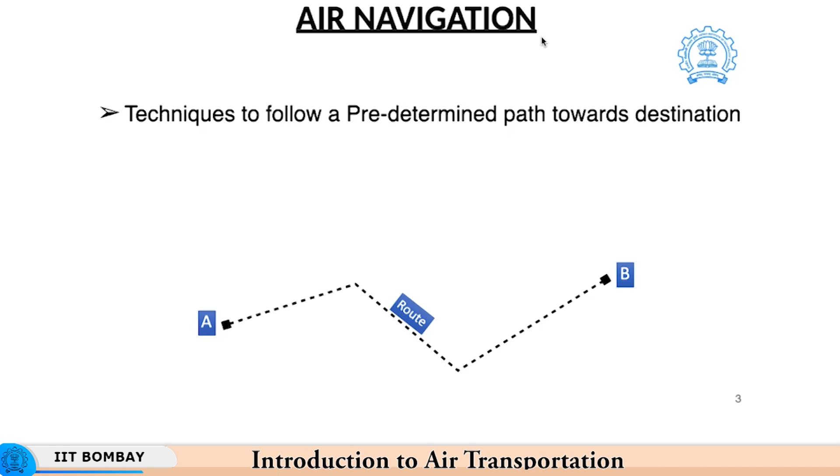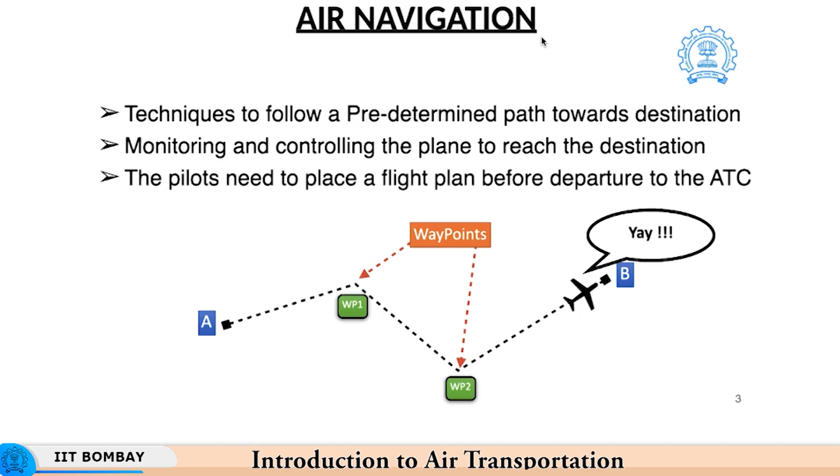Air navigation basically entails the different techniques that are required to be followed during the flight so that we can reach our destination via the predetermined flight path. This process also involves regular monitoring as well as controlling the plane so that the destination can be reached with the minimum amount of time and fuel consumption while covering the predetermined waypoints. The pilots, whether flying through visual navigation or via instrument navigation, need to file a flight plan to the nearest ATC before departure.

So, in order to understand any topic, we need to understand the historical evolution of that topic. This slide will cover different aspects related to the development of air navigation throughout history. The history of this evolution can be divided into the following subcategories. During the advent phase, that is the 1900s to the 1910s, most of the air navigation was carried out through visual markers, visual meaning through reference to the horizon. The pilots would basically make use of the visual aids available at their disposal to carry out the navigation.

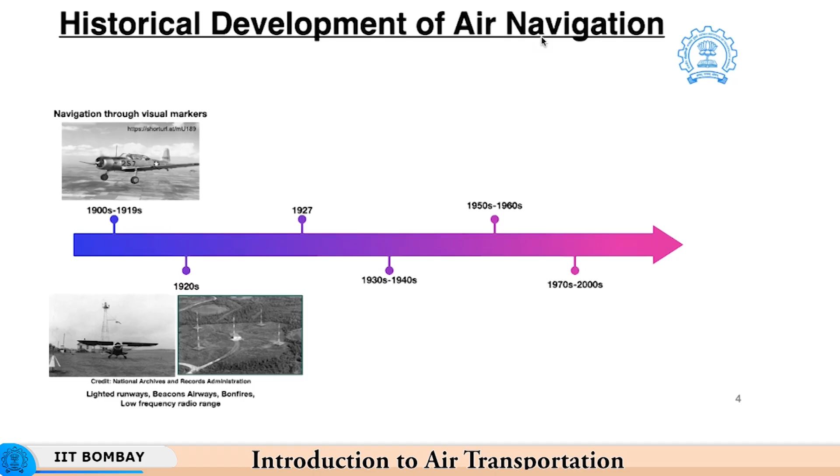Subsequently, as the need arose to carry out air mailing, which required flights to be operated in night conditions, a number of additional techniques were integrated across different airports. For instance, many airports made use of lighted runways, beacon airways, bonfires, as well as low frequency radio range communications. Subsequently, the most famous flight by Charles Lindbergh in May 1927 was one of the cornerstones of air navigation development. In fact, this 33-hour flight from New York to Paris was the turning point in aviation.

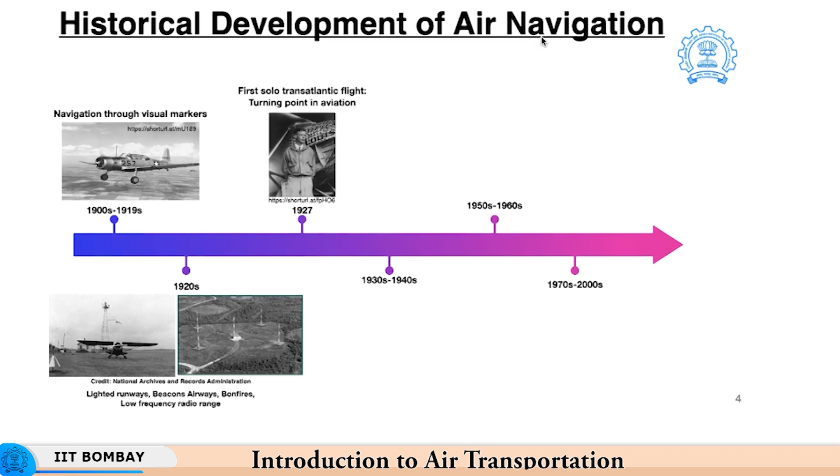The difficulties faced by Charles Lindbergh during his transatlantic flight were pivotal in determining the overall development of air navigation. In fact, this flight proved so crucial that this time is termed the Lindbergh boom, which resulted in a significant increase in interest towards aviation as well as development of various air navigation technologies. Based on the requirements to increase communication and improve air radio navigation technologies, techniques like non-directional beacons and ADF, that is automatic direction finders, were integrated on various aircraft to carry out navigation.

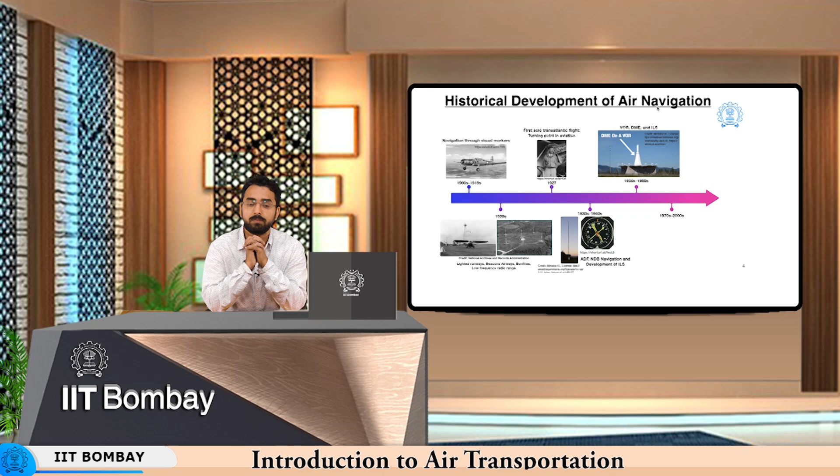Subsequently, the 1950s to 1960s era belonged to the evolution of VOR and DME as well as ILS technology, which were more advanced air navigation techniques to carry out more precise navigation. Between the 1970s and 2000, the aircraft industry ventured onto new techniques of air navigation, that is INS and GPS. Through the integration of these sophisticated technologies, navigation was not just limited to the line of sight range. In fact, navigation could be carried out over transatlantic regions also because of these technologies.

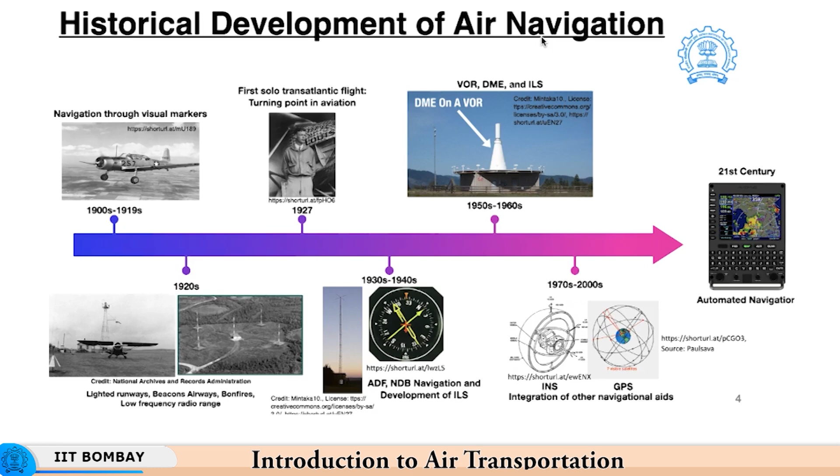As the technology further evolves, the 21st century is poised to implement more automated ways of carrying out air navigation. Most of the operations associated with navigation, like communicating with the ATC or vice versa, checking the waypoints, checking the overall route and the trueness of the route being followed by the flight, will automatically be carried out by the onboard computers. After understanding the historical evolution of air navigation, we need to understand the various factors that determine air navigation planning.

So air navigation, which entails the process of reaching from point A to B, is a process that needs to determine the most optimum route between A and B, so that minimum amount of fuel and time is consumed during the flight. This particular planning or route decided by the pilot is dependent on a number of external factors.

Some of these include that the planned route should conform with the laid down ICAO standards, ICAO rules, as well as compliance with the latest ATC instructions related to that route.

The route should be planned in such a way that fuel consumption as well as time is mitigated as much as possible. The route should also be planned so that a minimum safe distance is obtained with respect to neighboring flights as well as underlying airspace considerations, which we will discuss in a later slide.

So one of the most important parameters related to air navigation planning is what facilities and airways are available to the pilot, so that flight planning is carried out in a more efficient manner.

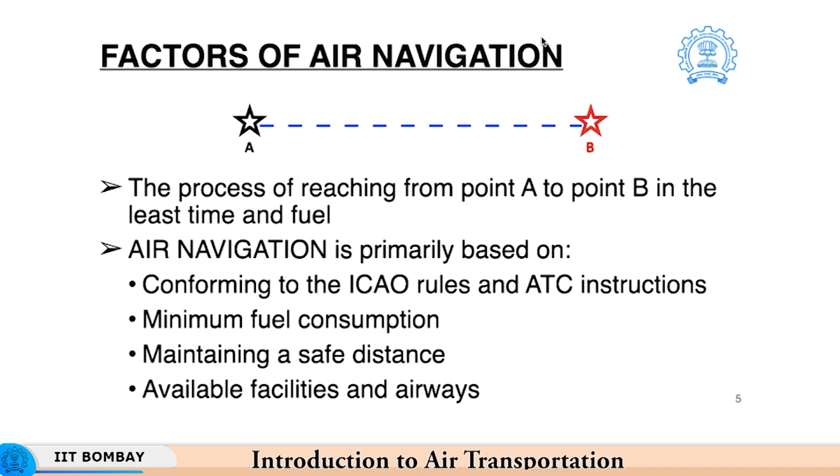So after going through the factors that affect the overall air navigation planning, we need to understand the objectives of any air navigation process. First and foremost, the objective related to air navigation is determining our current location.

Based on determination of the current location, we need to understand the nearest waypoint associated with our planned route, and what is the optimum route between the two waypoints, so that minimum fuel and time is consumed during this planned route.

So in order to achieve these objectives, there are many other external considerations that the pilot needs to take into account while carrying out flight planning. Some of these external factors include the presence of weather, that is, whether the planned route has any hazardous weather associated with it. Based on presence of such hazardous weather conditions, the pilot needs to readjust their planned route.

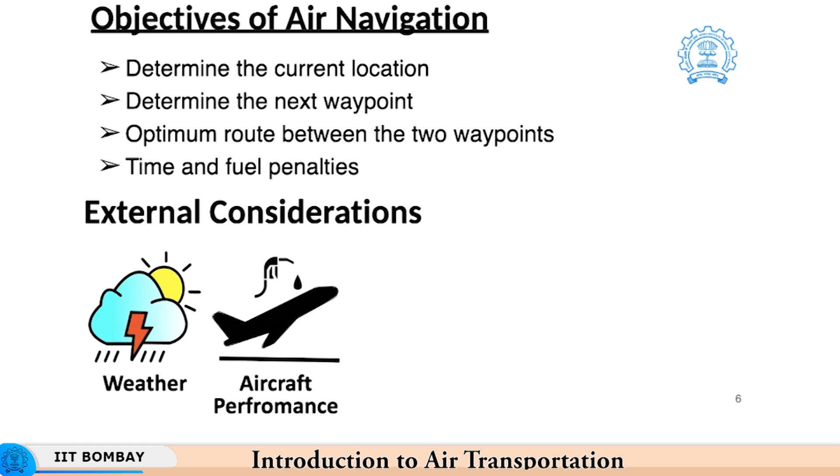Second parameter related to air navigation is the aircraft performance. As we all know, with advancement of time and increase in operational cycle of any aircraft, their performance goes on reducing. So the planning needs to consider this factor also.

The airspace requirements, as covered in the air transportation course during earlier lectures given by Professor Rajkumar Pant, there are many airspace constraints related to air traffic management service. So while carrying out air navigation planning, such considerations or constraints need to be taken into consideration.

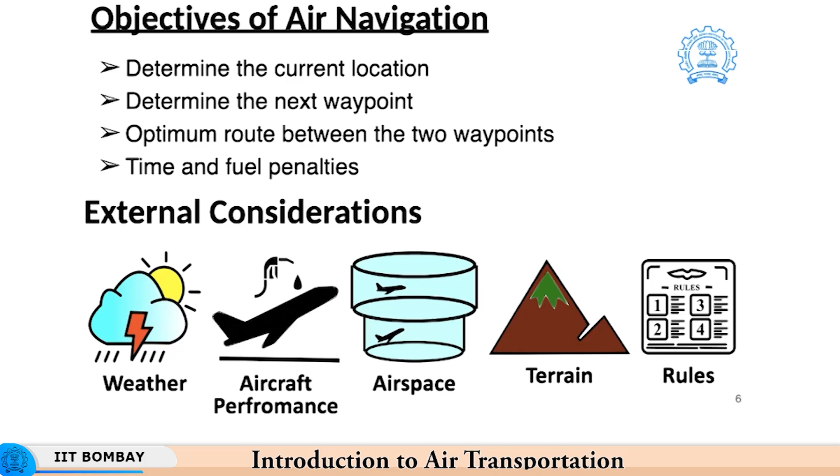The terrain underlying the planned route also plays a very critical role in carrying out the overall flight planning. Last but not least, the applicable rules associated with the planned course as well as the planned way of navigation also play a critical role in carrying out overall air navigation.

So based on all these aspects, the aircraft performance, applicable facilities, and instruments available to the pilot, there are two different types of rules by way of which pilots operate their flight: the visual flight rules and the instrument flight rules.

The visual flight rules, the most rudimentary form of air navigation, is purely based on visual flight navigation. The pilot makes use of visual references available during daylight and weather conditions, using the natural horizon and external visible outside reference to carry out the overall navigation.

This type of navigation requires a number of key components for efficient navigation. These components include the overall flight planning. As mentioned earlier, all air navigation requires filing of a particular flight plan to the nearest ATC before the commencement of the flight.

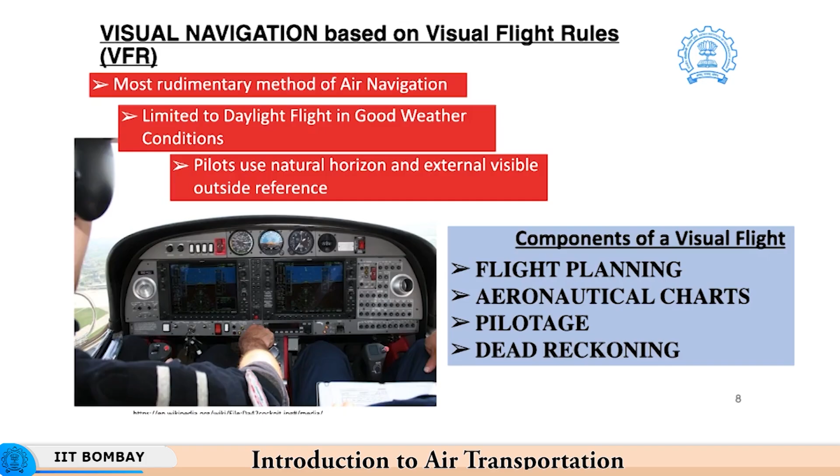Then the visual flight rule navigation makes use of aeronautical charts during the pre-flight as well as in-flight scenarios to carry out the planning. The two methods used to carry out this navigation are called pilotage and dead reckoning. Details related to these two methods will be covered in later slides.

So based on this, we can determine the different prerequisites of any VFR flight. If you are planning to carry out any VFR flight, you need to have three components with you always. First and foremost, the flight plan, which is designed by the pilot before the flight.

The planning is overall dependent on the fuel consumption requirement and the waypoints that the pilot will intersect during his flight.

The second component of the VFR flight is the aeronautical charts, and the third and one of the most important prerequisites is the weather forecast.

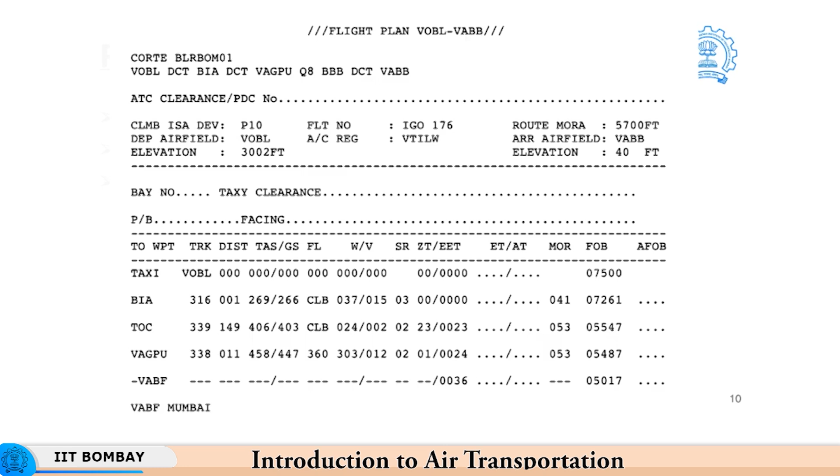As far as the flight plan is concerned, I will put forth a particular example. In this flight plan, the flight is planned between Bangalore and Mumbai, and the overall flight plan includes details related to the waypoints the flight will intersect during the flight, and minute details related to the aircraft, what would be the true airspeed and ground speed, what are the flight levels the plane will follow during the course, and what are the external wind conditions associated with the planned flight.

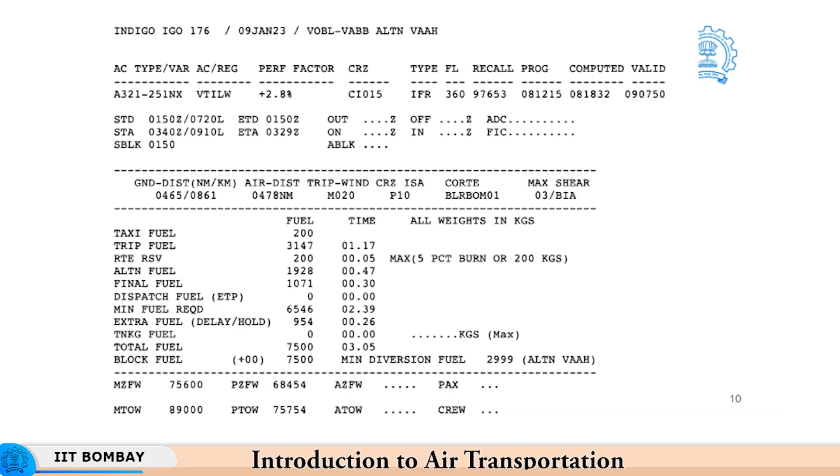Subsequent to this, the flight plan further includes details related to fuel consumption that the plane would incur during the different courses of flight. So the flight plan overall plays a very critical role in carrying out any visual flight rules navigation.

After carrying out and filing the flight plan, pilots need to use aeronautical charts to carry out navigation. These are specialized maps used by pilots that include different terrain features associated with the area being flown, applicable hazards and obstructions associated with the route, navigation routes and aids available at the pilot's disposal, applicable airspace rules, and the airports available for the pilot to land upon or use facilities from.

These aeronautical charts are of different categories. Most visual flight rule navigation makes use of a particular category called sectional charts. These 1:500,000 aeronautical charts, or sectional charts, are used comprehensively by pilots to carry out visual flight navigation.

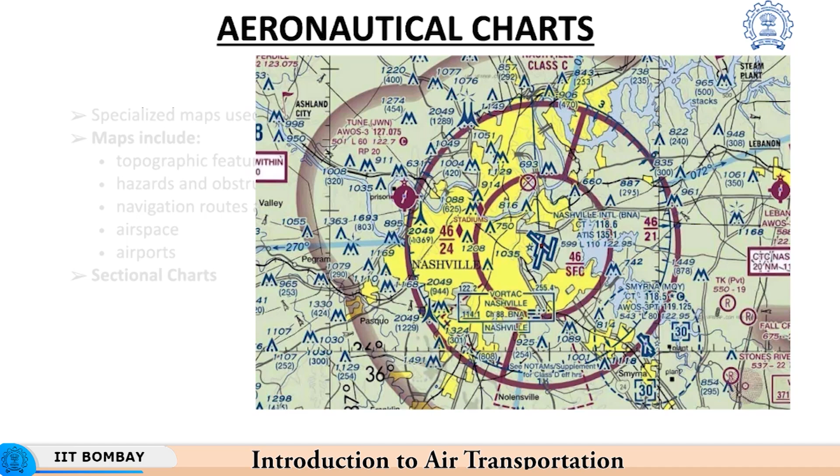There are also details related to obstructions associated with this sectional chart, and circles describing the airspace. For instance, the solid magenta line corresponds to class C airspace, and the dotted circles are class D airspace. So these sectional or aeronautical charts play a critical role in the overall air navigation process. To assist in flight planning, all these aeronautical charts are accompanied by an appropriate legend, so that flight planning can be carried out based on referring to these legends.

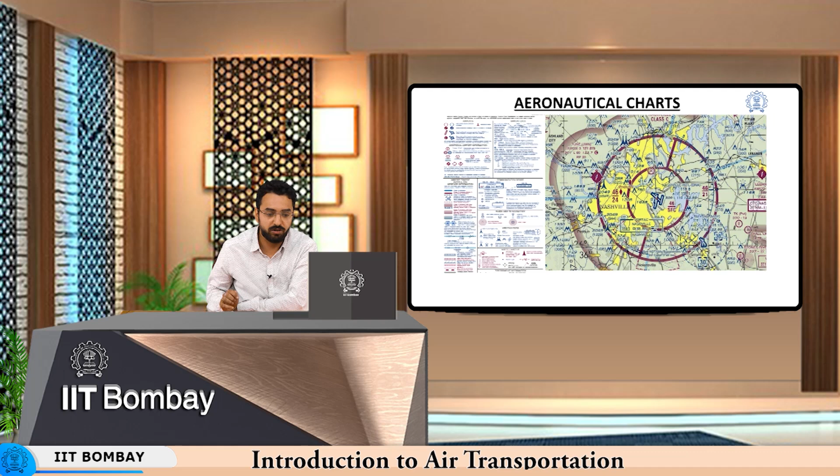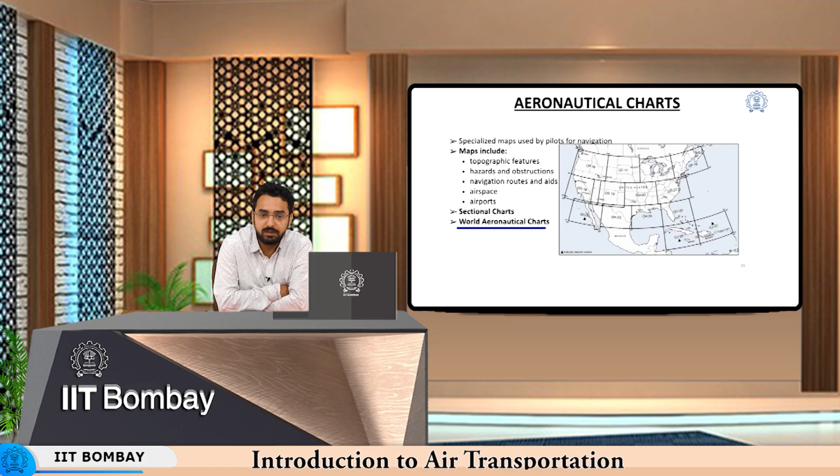World aeronautical charts are a subcategory of aeronautical charts, scaled at 1:1 million. Because of the increased scaling, most features related to control towers and minute obstructions are hidden. However, these charts have been used previously for long distance flights by different flight applications.

The third important prerequisite of any VFR flight is the weather forecast. Before commencement of any flight, pilots need to carry out a thorough evaluation of the weather forecast associated with the airport of departure as well as the airport of destination, also understanding the weather forecast associated with the planned routes so that on-course planning can be carried out.

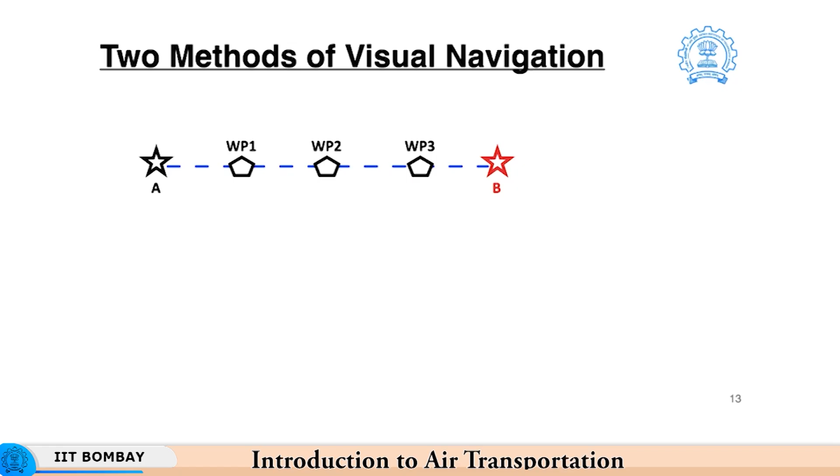So what are the two methods of visual navigation? If we want to reach from point A to point B, we can carry out visual navigation through the usage of two methods while covering the different waypoints. These two methods are called pilotage, and the second method is called the dead reckoning method.

What is pilotage? Pilotage is basically the most basic form of visual navigation, which makes use of visual aids and markers along with the aeronautical chart to carry out navigation. How does this work? Let's understand this with an example.

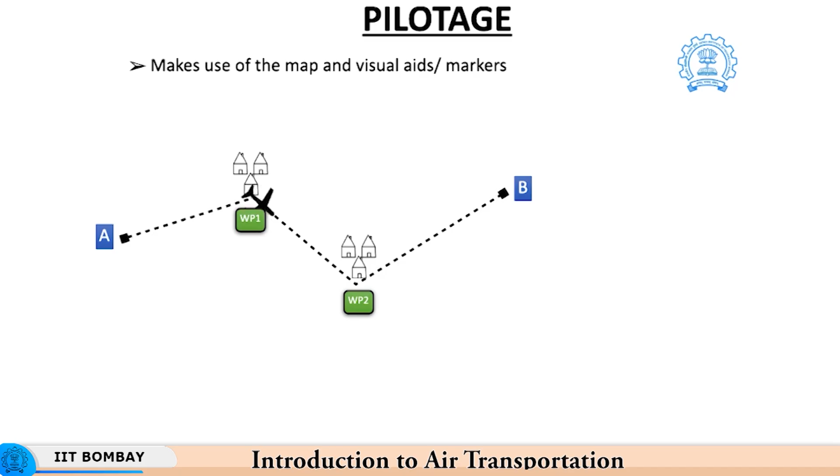Suppose a pilot wants to reach from point A to point B. He will select two different towns annotated as waypoint 1 and waypoint 2. When he selects these waypoints, he wants to have a particular obvious visual reference which the pilot can follow during his flight, and he can ultimately reach his destination. Based on these waypoints, he will plan his route and also follow them to carry out this navigation.

Despite carrying out the planning, regular adjustments are required to be carried out during the flight, so as to mitigate the deviations that arise because of external environmental conditions. These external conditions are basically related to deviations that arise due to the presence of crosswind conditions. So the inclusion of crosswind condition and the applicable corrections required to carry out air navigation plays a very critical part of the overall pilotage process.

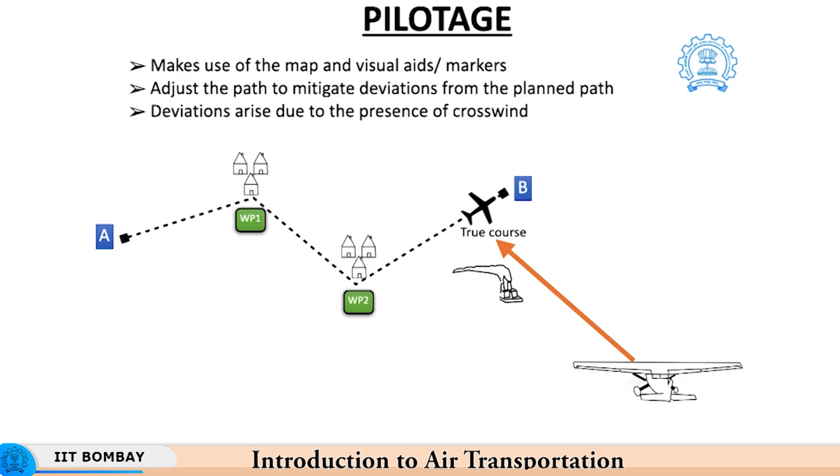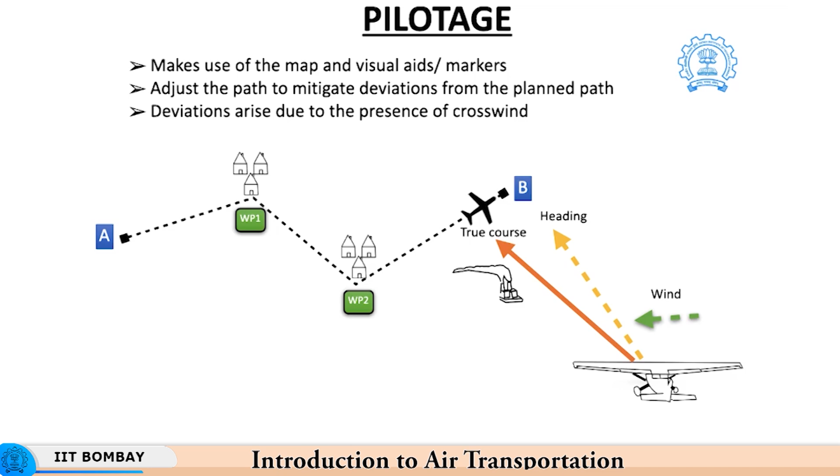In case of the presence of any wind conditions, the pilot needs to adjust his heading according to the external wind condition so that the true course can be efficiently followed. For example, in this case, the wind is coming from the right, so the pilot needs to adjust his heading towards the right so that the overall deviation towards the left can be mitigated and the true course can be followed by the plane.

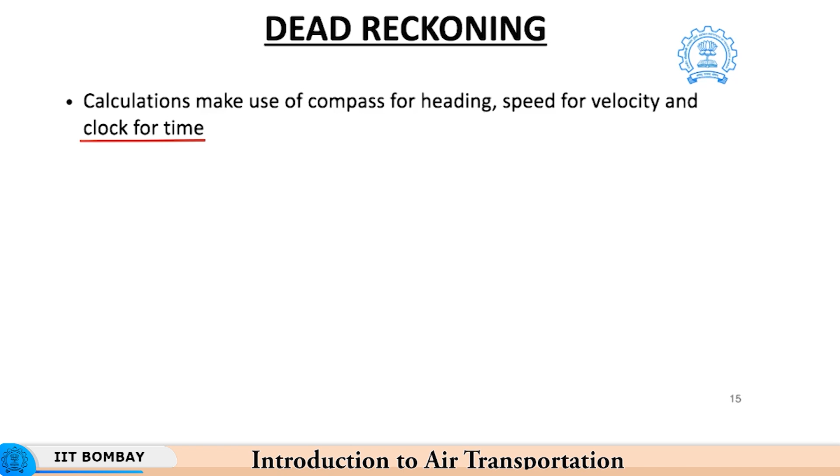The second method of visual navigation is called the dead reckoning method. How does this differ from pilotage? It differs in the sense that along with heading calculated by compass and speed determined by the airspeed indicator, this process brings into picture the time aspect also. So pilots majorly make use of a combination of pilotage as well as dead reckoning to carry out their navigation.

This method is subsequently carried out to calculate the overall deviation that the flight has incurred during the flight. How is this done? For example, if the pilot has planned to follow a particular course from point A to point B, he determined his location at a point at 1000 hours. After 10 minutes, he determines that the position has changed to a particular reference point which he has logged. After another 10 minutes, he will again determine what is his current location.

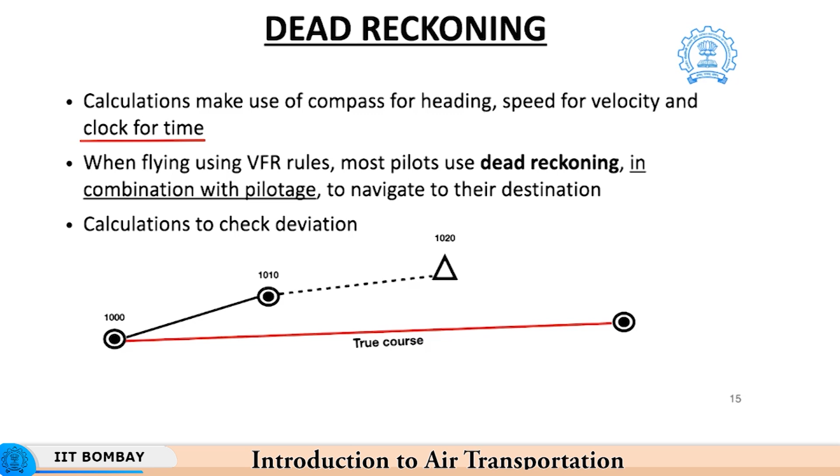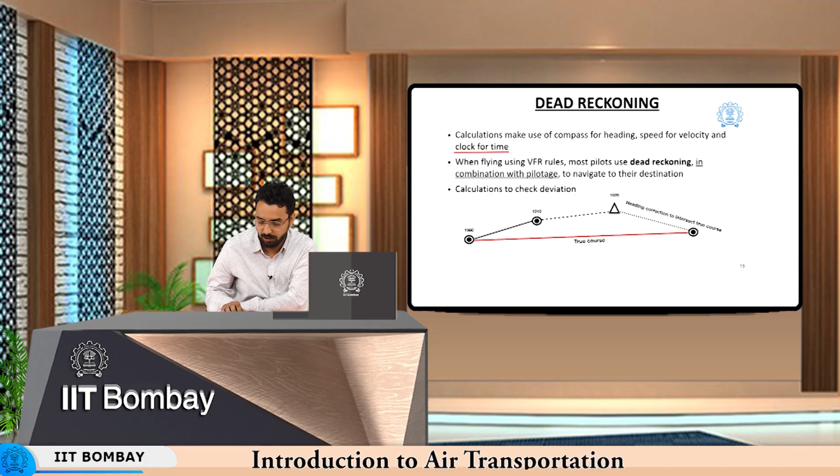So based on time, speed and heading, and the usage of proper trigonometry, he can calculate the applicable heading that the pilot needs to adjust his plane to, so that the true course can be intersected. So this is the overall process of dead reckoning, wherein time also comes into picture.

One of the most important aspects related to dead reckoning is the wind triangle. What is this wind triangle? It is a mathematical tool that is used comprehensively by pilots to carry out different aspects related to a flight. For instance, through the usage of wind triangle, wind correction angle can be determined, so that the overall heading that the pilot needs to follow can be determined.

The wind triangle can also be used to calculate the drift. For example, during a flight, the pilot determines that the plane has drifted away from its planned course. Through the usage of this wind triangle, the overall drift of the particular plane can be determined. Based on this wind triangle, the overall ground speed as well as the heading to maintain the true course can be obtained, and based on these calculations, the overall time that the pilot would incur to reach the destination can also be obtained.

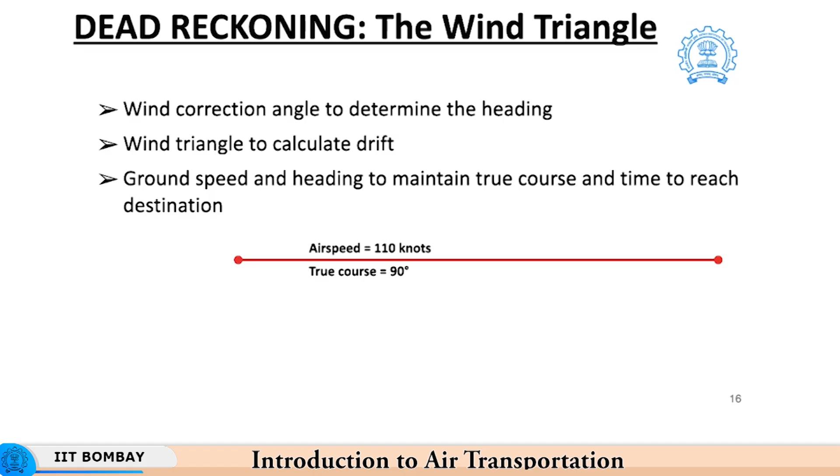So in order to understand this wind triangle, there are two different methods that I have presented in this presentation. Method A: in method A, for example, we know the airspeed that the flight will follow, and what is the true course that the plane needs to follow to reach its next waypoint. In this case, the length of this line is not yet determined.

So from the head of this wind direction, a line will be drawn intersecting the true course line in such a way that the length of the red line would correspond to an airspeed of 110 knots. So based on this calculation, we can determine what is the wind correction angle that will be required to follow the particular true course. So then the other method, that is method B.

In this method, we firstly draw a line corresponding to 110 knots related to a true course of 90 degrees. Suppose we know a wind speed of 20 knots coming from port, from a direction of 30 degrees. The line that joins the head of the true course line to the wind direction will be ultimately useful to carry out the overall drift.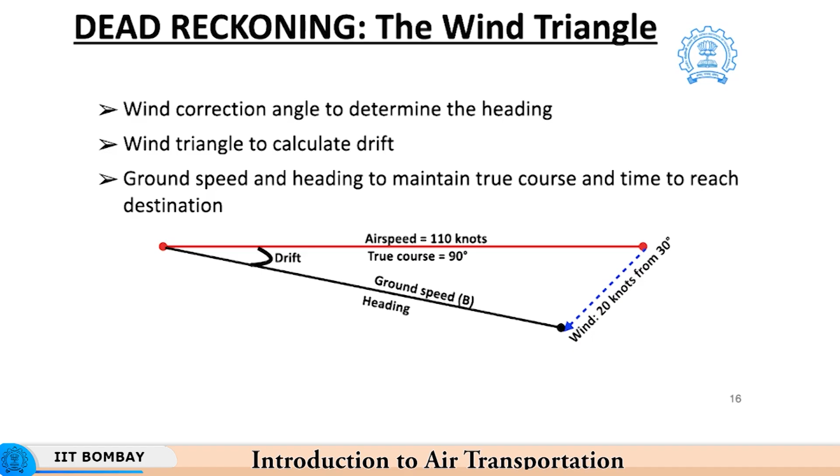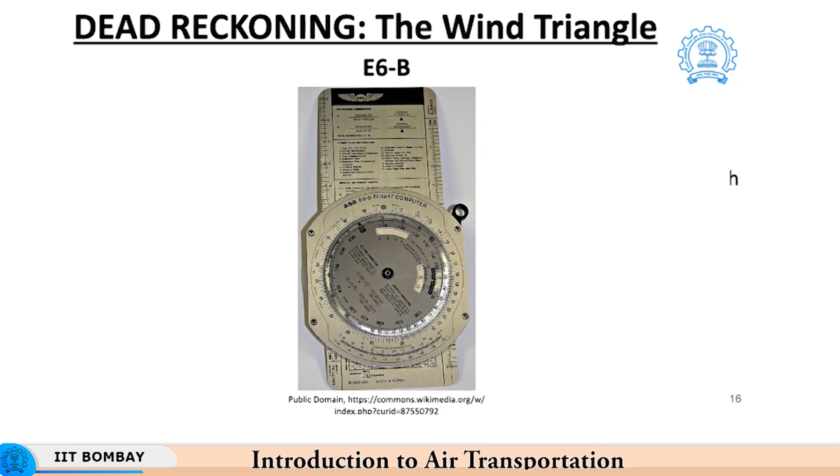As you noted till now, this is a tad difficult during the overall flight operation. In order to circumvent this problem, pilots during their visual flight make use of a particular computer called the E6B computer. So all these calculations that were shown to you previously have been integrated in this particular E6B computer itself.

So as far as the instruments related to visual navigation are concerned, there are two important instruments that are used to carry out such navigation. These two instruments are called the magnetic compass and the heading indicator. What is a magnetic compass? A magnetic compass is based on a simple principle of magnetism. As many of the viewers might know, a magnetic compass basically works on the fact that whenever you place a magnet, it always aligns with the north-south direction. Based on this principle itself, the magnetic compass operates.

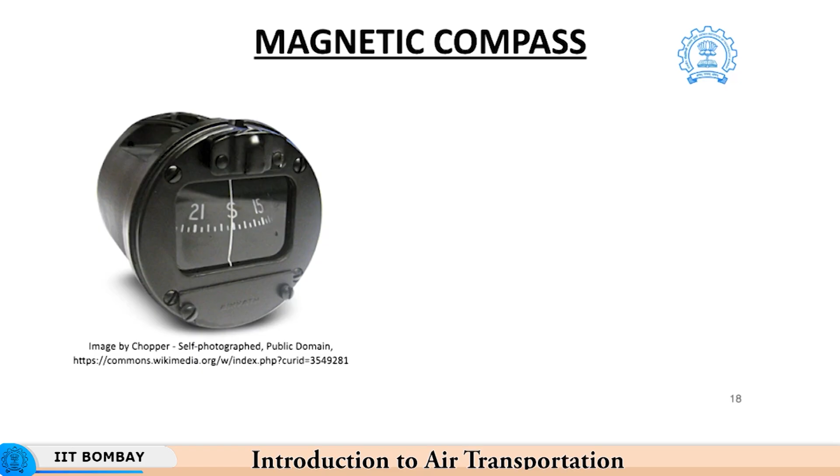So in this particular figure that you see, this is a magnetic compass which is embedded inside a liquid, and based on the magnetic orientation, the overall magnetic heading of the aircraft can be determined. A point to be noted here is that these instruments always point towards the magnetic north pole, and so the heading shown by the instrument is a magnetic heading reading, whereas the aeronautical charts used to carry out flight planning are based on true north.

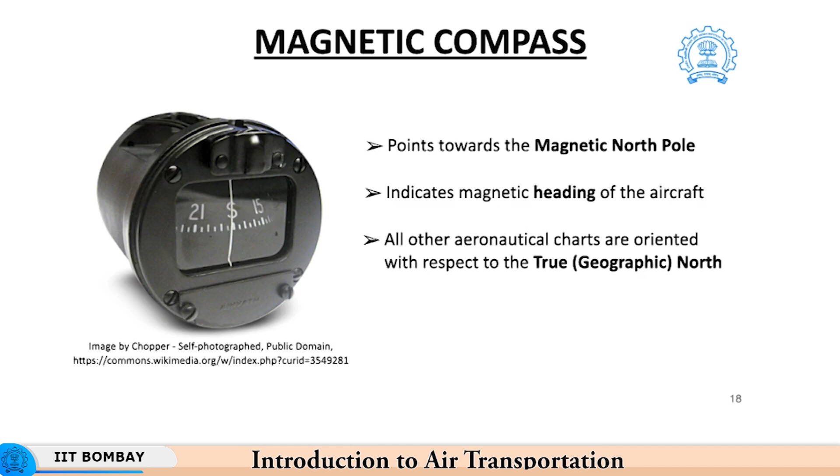So here lies the ambiguity. There is a difference between magnetic north and true north. This difference leads to a new term that is called the variation. This difference between true north and magnetic north is a very important aspect of carrying out navigation using the magnetic compass. Why does this variation arise? For instance, suppose there is a line joining true north and true south.

Ideally, if magnetic north and south were aligned with true north and south, this type of variation would not arise. But the magnetic meridian, the great circle that passes through the magnetic north and the magnetic south, is not aligned with the true meridian. For instance, the magnetic north is located somewhere in the northern Canadian region, and so the difference between the true north-south line and the magnetic north-south line is called the variation angle. Now this variation angle depends on the aircraft's current location and time.

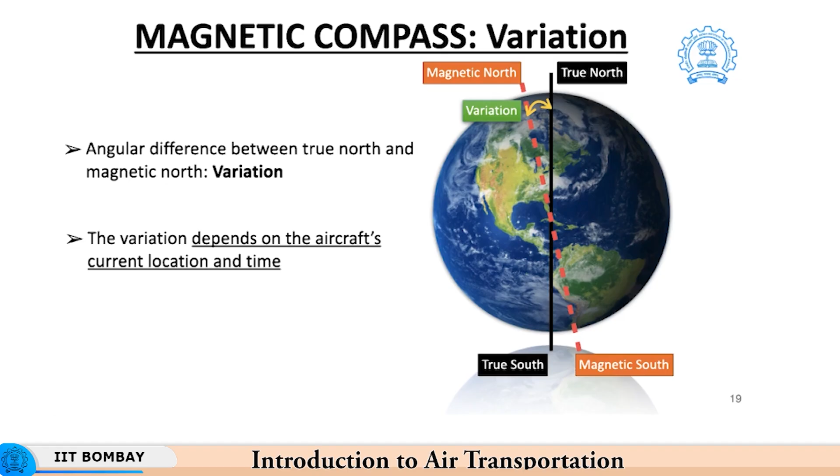So if you're thinking that magnetic variation would be the same at all locations, it is not the case. It varies from location to location as well as from time to time. In order to determine this, pilots make use of isogonic line charts. As you can see in this figure, this is a representation of the variation at different locations on our Earth, and the lines joining similar variation are called isogonic lines. The lines which join variation corresponding to 0 are called agonic lines. These charts are used by pilots to determine the variation angle.

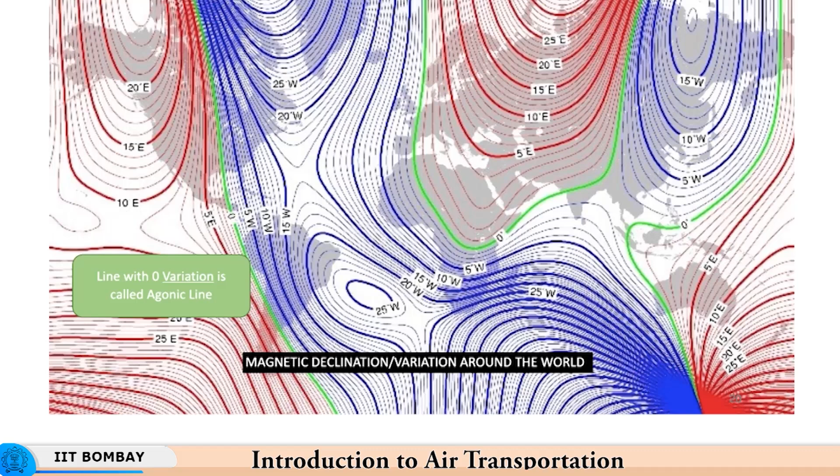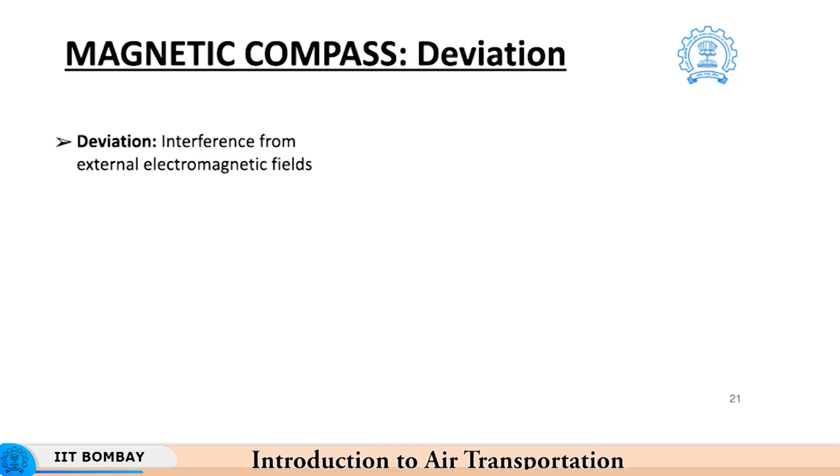The other disparity related to magnetic compass readings is called the deviation. So why do these deviations arise? These deviations arise because of the interference of external electromagnetic fields with the compass operation. In order to determine this value during cockpit design itself, the engineers determine the applicable deviations that arise because of these electromagnetic fields, and these are presented to the pilots in the form of a magnetic deviation card.

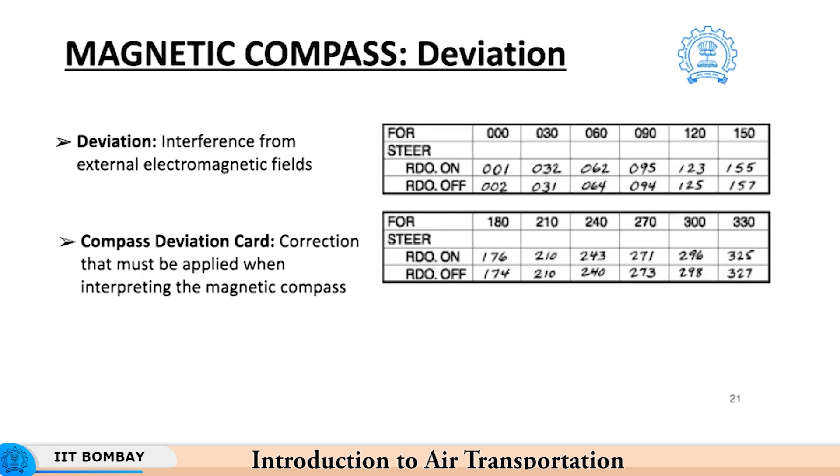During the calculation process, the pilots refer to these deviation cards to carry out the overall calculation, so that the actual compass heading that the pilot needs to follow is determined accurately.

So based on these corrections that are required to the compass heading, the pilots make use of the magnetic compass while navigating, and in order to carry out this navigation in an appropriate and efficient manner, the pilots need to implement these variation and deviation angles into the overall calculations. And based on these calculations, the pilot will follow the overall compass heading, which is the actual heading that the pilots need to follow, so that the planned course can be followed.

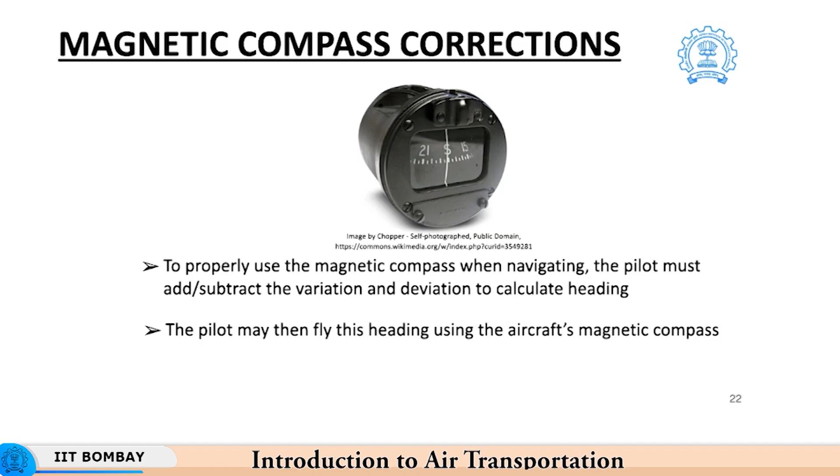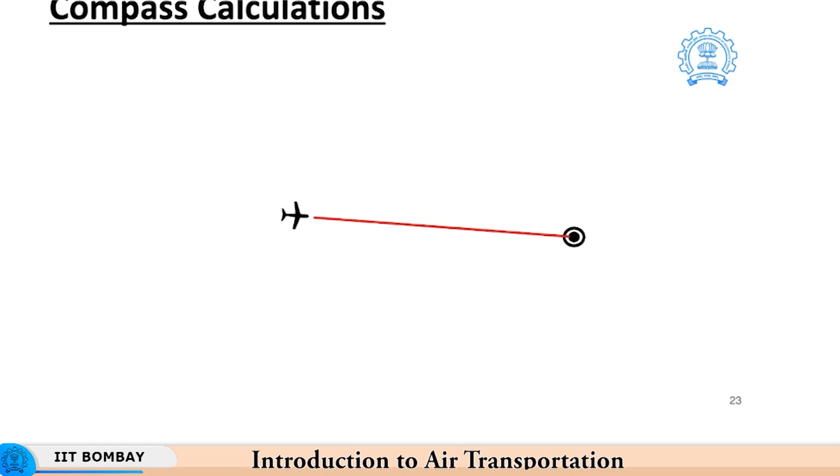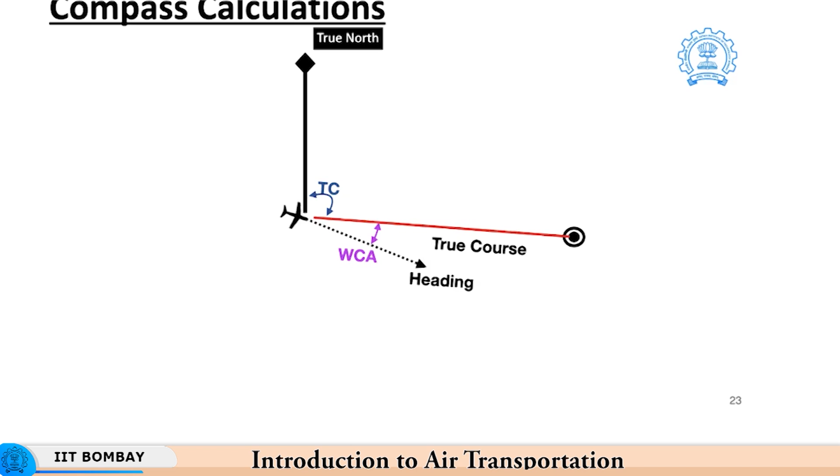So let's understand this with an example. Suppose a pilot has determined a particular course that he needs to follow to reach a particular waypoint. This course is based on the true north. This is called the true course. Based on the external wind conditions, and while implementing the wind triangle, the pilot can determine what would be the applicable wind correction angle, and integrating this wind correction angle, the pilot can determine the true heading that the pilot needs to follow.

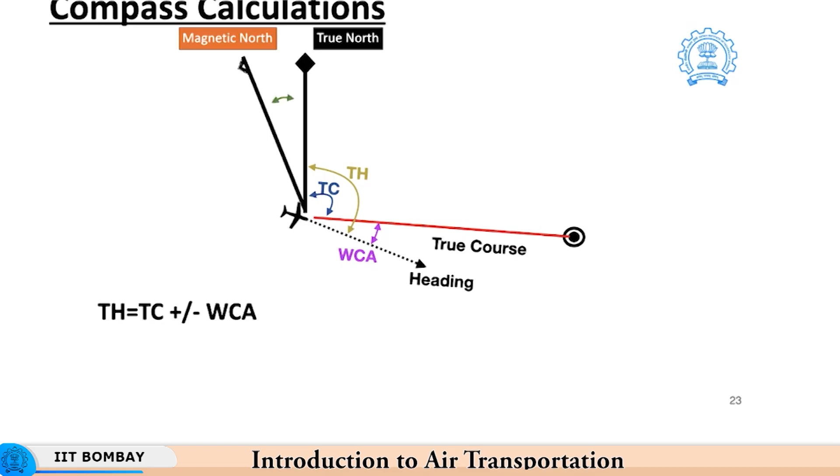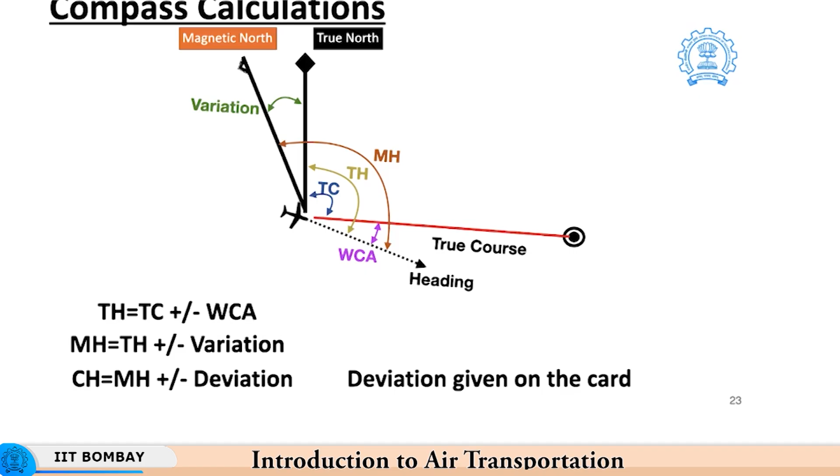Now this true heading excludes deviations arising due to the different magnetic compass readings. Firstly, the variation angle has to be integrated. Based on this correction, the overall magnetic heading can be determined. After carrying out addition and subtraction associated with the deviation, the overall compass heading can be determined, and this is the final heading that the pilot will refer to during his flight to carry out the particular navigation.

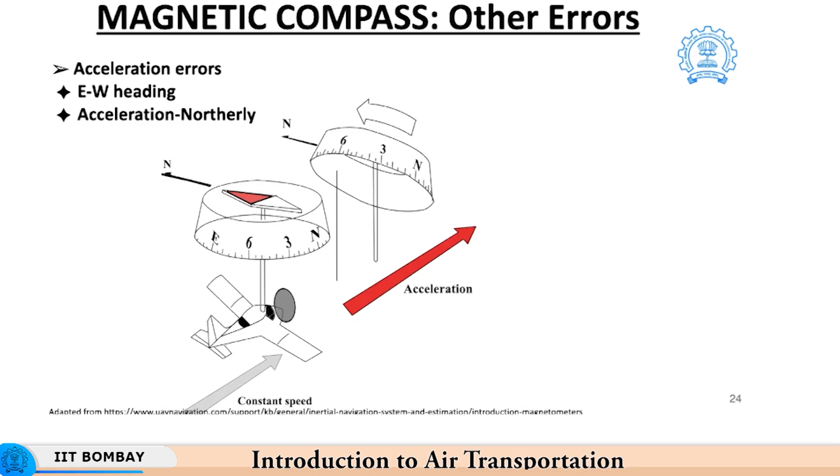So apart from the variation and deviation angles that the pilot needs to consider while carrying out navigation using the magnetic compass, there are some other errors also associated with this type of navigation. Some of these errors arise because of the presence of acceleration. This type of error basically arises when the plane is flying in an east-west heading. Whenever an aircraft accelerates, the compass will point in a more northerly direction, whereas if the plane decelerates, it will point in a more southerly direction. In order to memorize this, there is a particular acronym that pilots use, that is ANDS, to determine the overall error associated with acceleration.

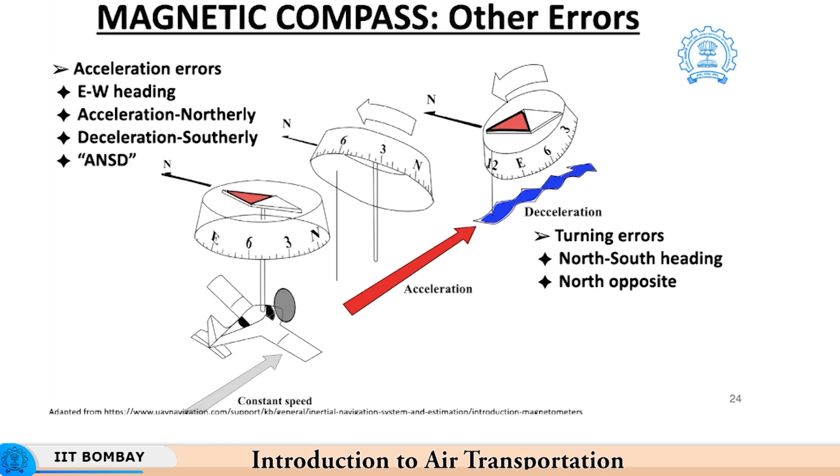Apart from acceleration, there are also errors associated with turning. These types of errors occur when the plane is flying in a north-south heading. If a plane tries to turn while on a northern heading, the compass will show a slow rate of turn, whereas when a plane tries to turn while flying in a southern direction, the compass will show a more exaggerated rate of turn. In order to memorize this, the associated acronym is NOSE.

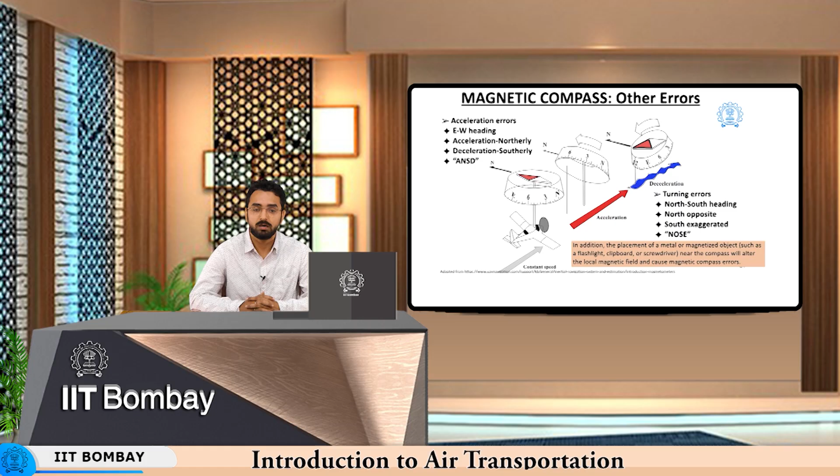So apart from the acceleration and turning errors, there are many other errors associated with the presence of electromagnetic fields, or errors associated with the presence of magnetized objects that can create local magnetic fields and thus create errors in the overall compass heading readings. So as I pointed out, there are many errors associated with magnetic compass heading readings, and there are many calculations that need to be integrated while carrying out the overall flight planning.

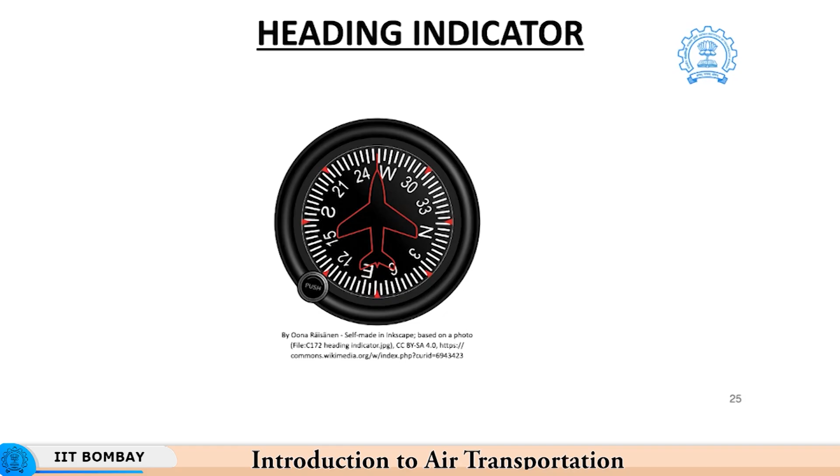So in order to reduce these problems, pilots started making use of another instrument to carry out visual navigation. This instrument was called the heading indicator. This heading indicator is also called the directional gyro, and is used to determine the overall aircraft direction to aid the pilot in carrying out air navigation. From a procedural point of view, before the commencement of the flight, the heading indicator needs to be calibrated so that it will show the accurate heading value.

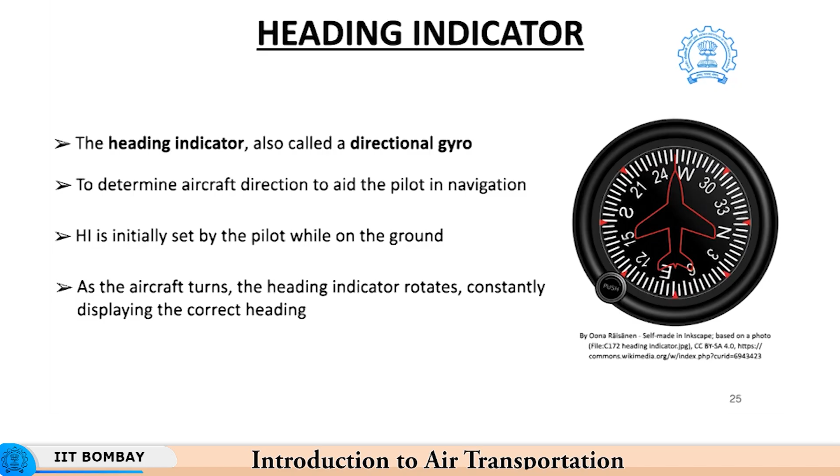So as the aircraft turns, the heading indicator rotates, constantly displaying the correct heading. As you can see in this particular figure, whenever the aircraft turns, the aircraft symbol will remain static, but the dial will change. Based on the change of this dial, the pilot can determine the overall heading that the plane is being flown upon.

As I mentioned to you, these heading indicators are based on the principle of the gyroscope. Now what are these gyroscopes? Since this is not a mechanical lecture, I will just briefly tell you about these gyroscopes. These gyroscopes are basically mechanical systems which include a central rotating mechanism surrounded by external gimbals. This rotating mechanism has the feature of staying in its rotational axis, whereas the external gimbals are free to rotate about their axes in any particular direction. So based on this particular principle, these gyroscopes operate.

The overall instrument is designed in such a way that the static direction is aligned with the rotating disc, and based on this reference, the overall orientation with respect to that static axis can be obtained, and thus the overall deviation can be determined.

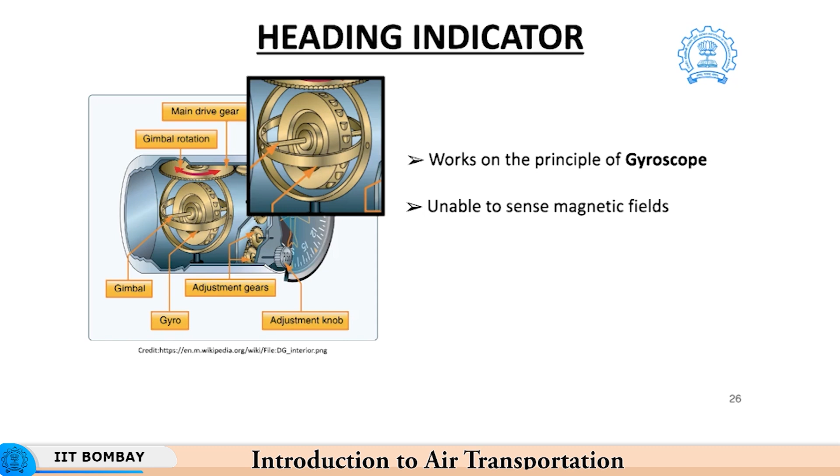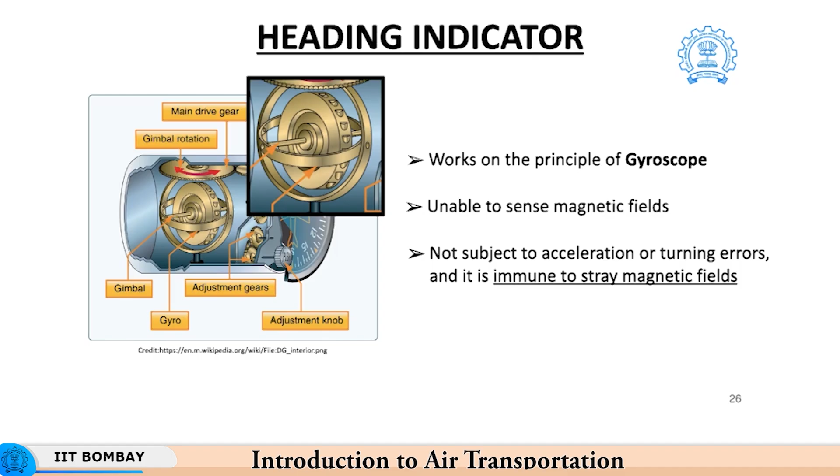Because these are not dependent on the magnetic fields, the overall errors that were associated with the magnetic compass don't come into picture with respect to the heading indicator, and moreover the acceleration and turning errors associated with heading indicators are negligible. Despite these advantages, there are some other underlying disadvantages related to heading indicators.

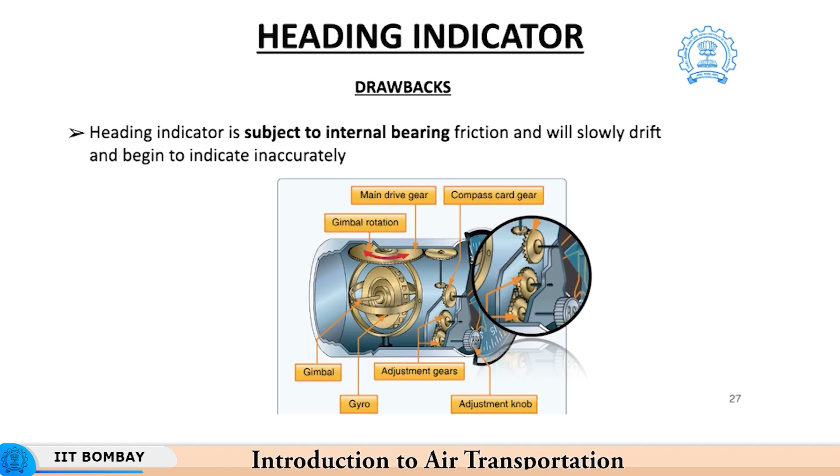Some of these include the fact that these are based on mechanical systems. They are always prone to internal bearing issues. Because of the presence of such wear and tear and internal bearing issues, the heading indicator slowly drifts away from the actual value, and hence these need to be regularly tuned.

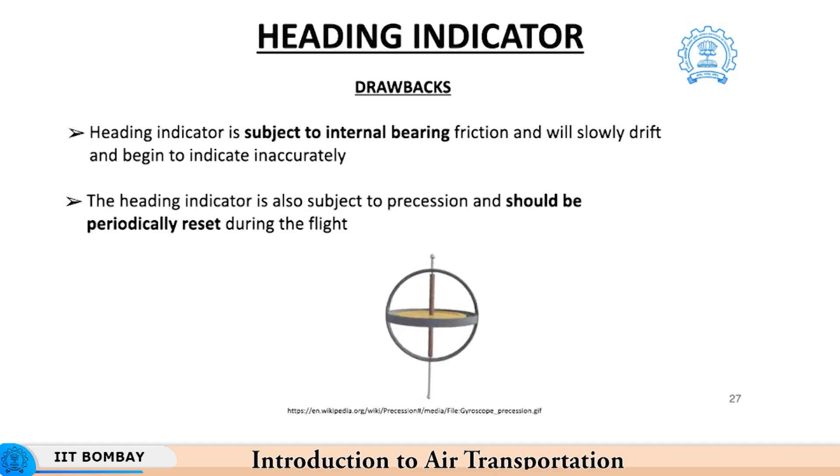The second error associated with these instruments is the presence of precession. As you can see in this, just like a top, as time progresses, these gyros tend to precess in a particular direction, and hence these require regular fine tuning so that the indicated heading is accurate.

So what is the overall VFR process? First, based on our flight planning, we determine the true course. This true course is based on minimizing the fuel as well as the time constraints. Subsequently, based on this true course, we log this in our aeronautical chart. This aeronautical chart will be available to the pilots during the flight phase also, to carry out the reference process.

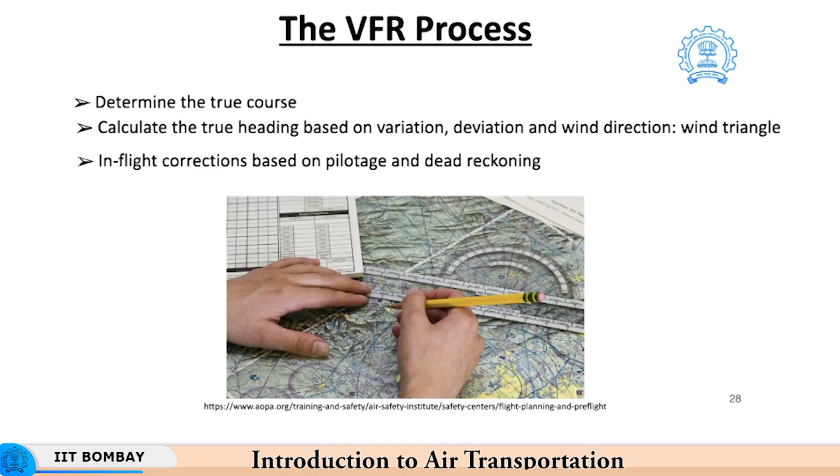Based on this true course and the applicable variation and deviation, the overall true heading that the plane needs to follow will be determined, and after carrying out this planning, in-flight corrections are also required based on pilotage and dead reckoning, so that the planned course can be followed in a more efficient manner.

Despite carrying out all the planning in an efficient manner while including corrections associated with the magnetic compass, deviation, variation as well as wind correction angle, there are many drawbacks associated with visual flight navigation. The most prominent drawbacks are the difficulties that the pilots will face while carrying out visual navigation when the plane flies in night conditions or bad weather conditions, or in sparsely populated regions.

All these flight conditions would make it impossible to refer to any visual aid, or to the horizon. So because of these conditions, visual navigation will be very difficult. In order to mitigate these problems, many measures have been taken. For example, night operation has improved because of the integration of runway and airport lighting, as well as airway lighting.

So what is airway lighting? Airway lighting technologies were erstwhile implemented across various airports in the USA. These airways made use of 51 feet towers. Atop these 51 feet towers was placed a beacon, and these beacons were coded so that the pilot could determine the type of airport or waypoint, and also whether the plane is going towards or away from the waypoint.

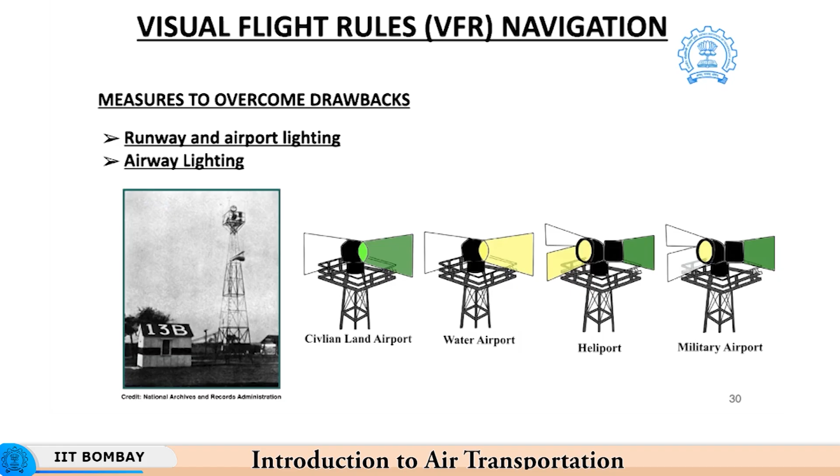So these are some of the measures that were implemented erstwhile by airports all across the globe, especially across the USA, to mitigate problems associated with night flight operations. Despite these measures, there were still unavoidable circumstances or hindrances associated with visual flight navigation.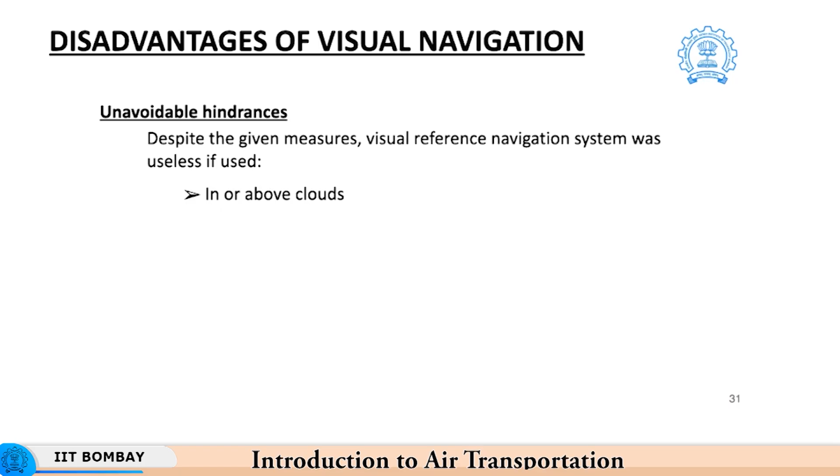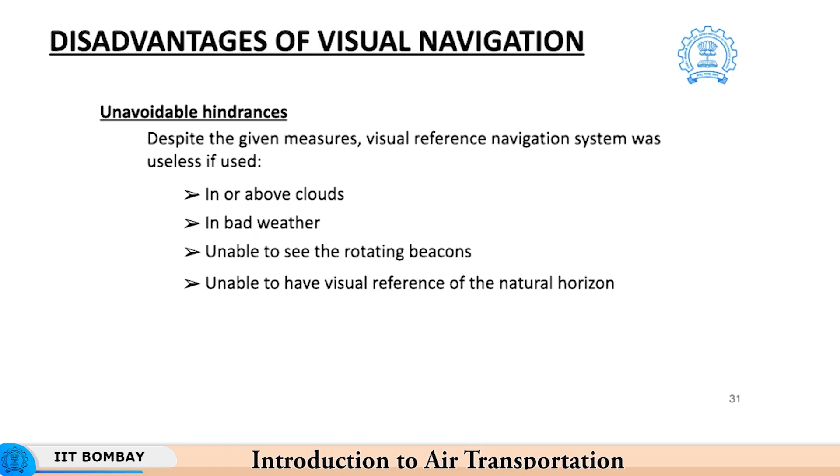For instance, if the flight was operated in cloudy or bad weather conditions, the reference to visual aids or beacons was hindered, and hence visual references could not be established, making visual navigation an onerous task. To circumvent this problem, pilots started venturing onto a different mode of navigation, called instrument flight rule navigation, famously known as IFR navigation.

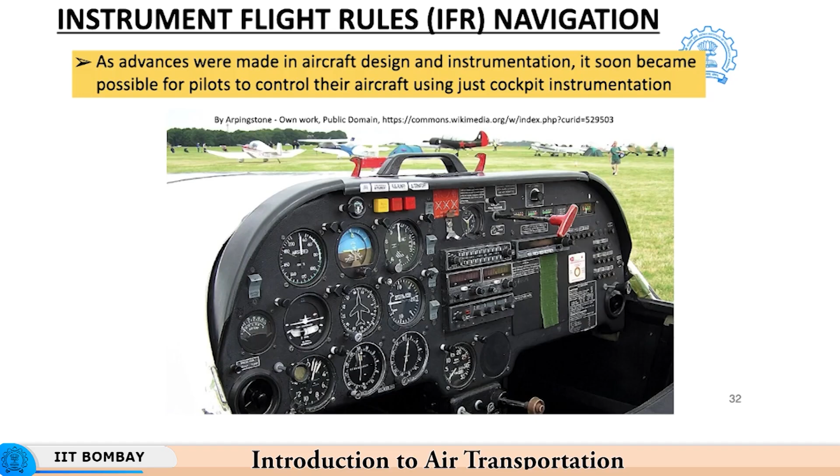This type of navigation made use of a number of instruments. As aircraft design and instrumentation technology evolved, the pilots were able to control their flight and carry out the navigation just through reference to their cockpit instruments. Hence, visual reference to the natural horizon was not a mandate, and navigation could be carried out through these in-flight instruments themselves.

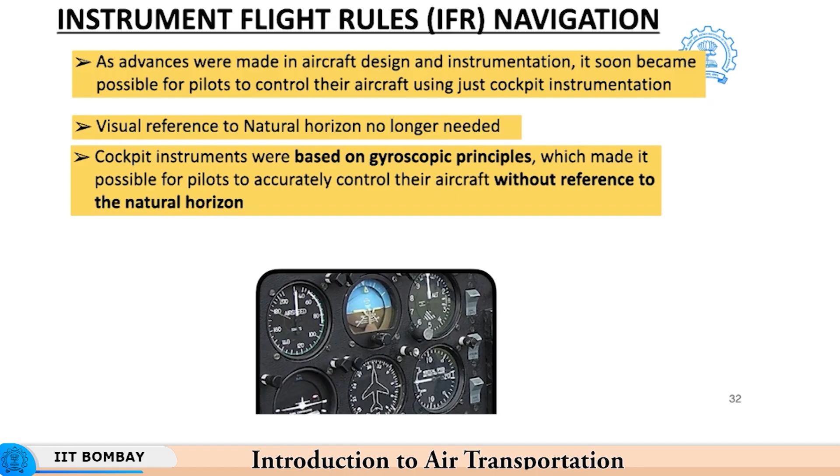The most notable feature of these instruments was that they were based on gyroscopic principles, which made it possible for the pilots to control their aircraft without reference to the natural horizon. The most notable instruments used worldwide to carry out such navigation are called the six-pack instruments, as you can see in this figure. These six-pack instruments are the most important aspect of instrument flight navigation.

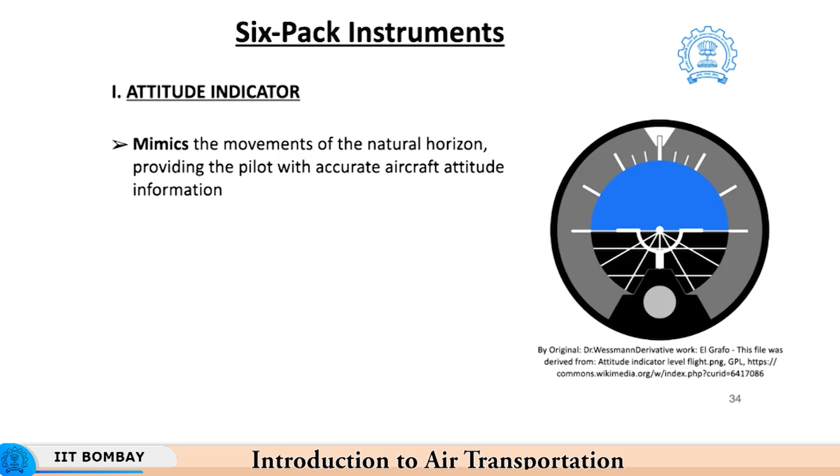The different six-pack instruments that are used worldwide are as follows. The first is the attitude indicator; this particular instrument basically mimics the overall attitude of the aircraft. So as you can see in this particular figure, the overall location of this artificial aircraft with respect to the natural horizon will determine what is the overall attitude of the aircraft, and based on reference to this particular instrument, the pilot can adjust their flight attitude and keep the aircraft upright and under control.

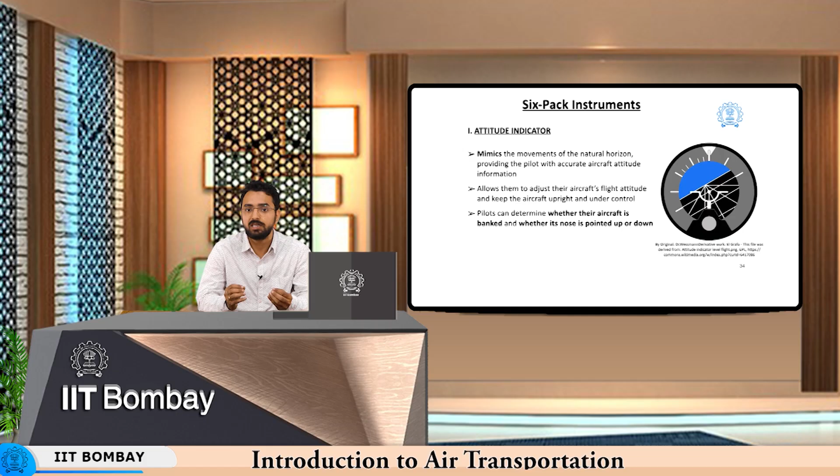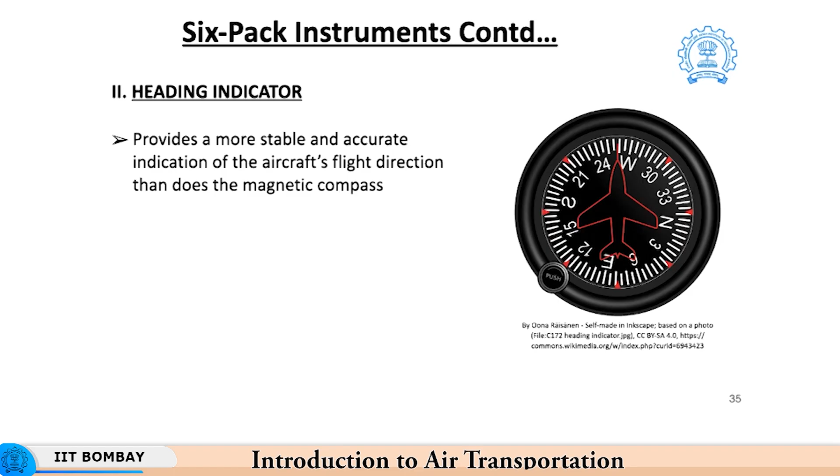Then the other six-pack instrument is called the heading indicator. As I already mentioned to you, this gyroscope principle based instrument is a very efficient way of determining what is the overall direction of motion of the aircraft. The third instrument is the turn and bank indicator. Now this instrument is basically used to determine what is the direction and rate of turn of the overall aircraft.

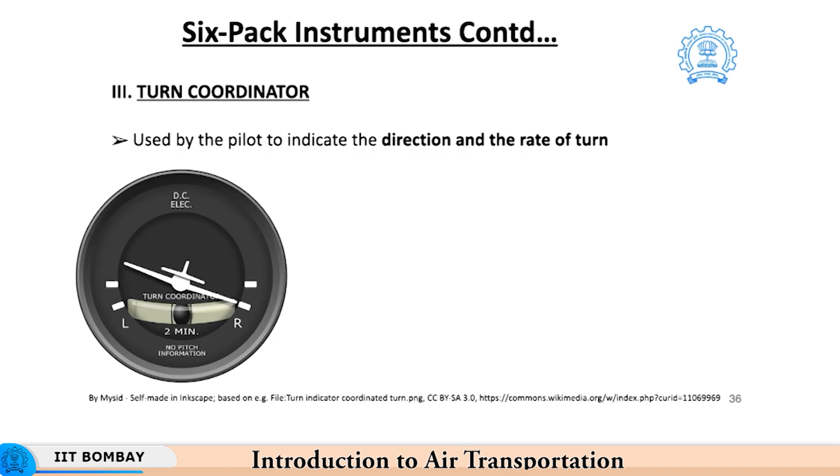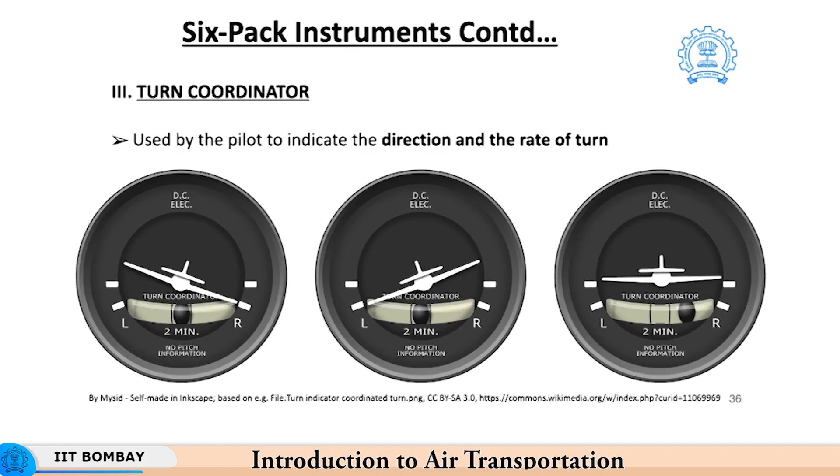For example, in this particular figure of yours, the pilot can determine that the plane is banked in a right turn direction. In this particular figure, the plane is oriented in a left bank direction, whereas through the deviation of the ball that you can see in this particular image, the pilot can determine whether the plane is in a skid motion or not.

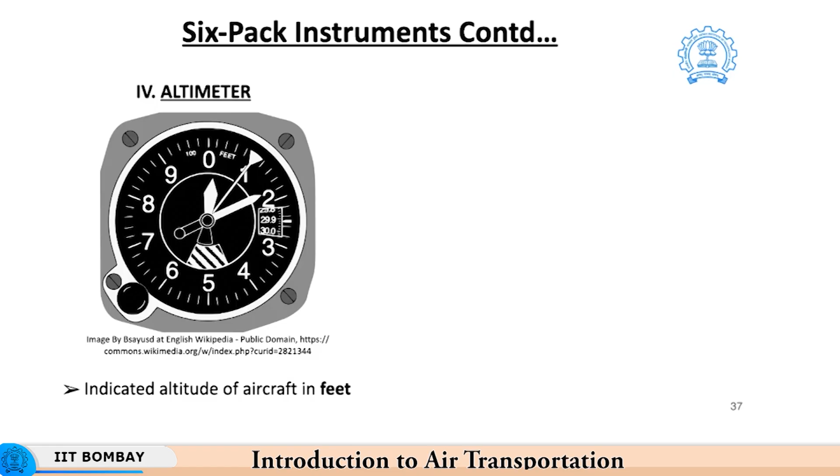The fourth and one of the most important instruments related to instrument flight navigation is the altimeter. So the altimeter, based on the principle of static pressure evaluation, determines what is the height of the aircraft with respect to mean sea level in feet. There are three different dials associated with this, that is corresponding to 100 feet, 10,000 feet as well as 1,000 feet pointers. Now these altimeters have to be adjusted throughout the flight based on the prevailing flight conditions, and hence it is a very important aspect related to instrument flight navigation.

The fifth six-pack instrument is called the airspeed indicator. Now this instrument is used to determine the overall airspeed of the aircraft. Now why is airspeed important? Airspeed will determine what is the overall fuel consumption and the time consumption associated with your flight. Moreover, the determination of the airspeed also determines whether your plane is flying at a speed that is in an operational range or a critical range.

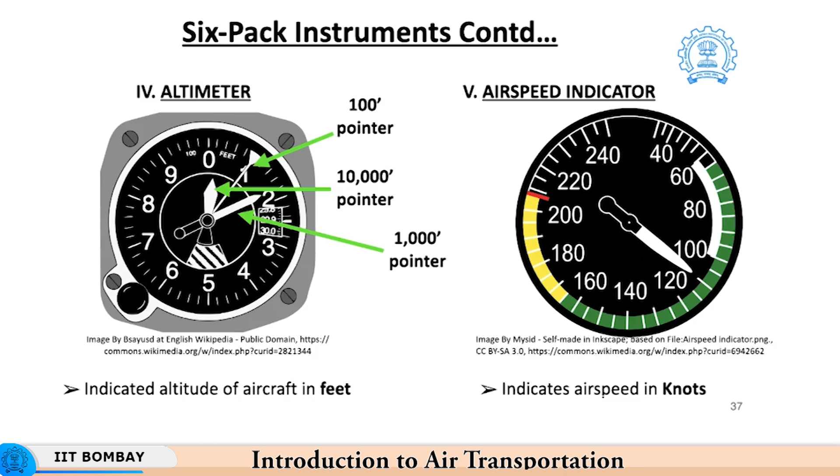The last important six-pack instrument is called the vertical speed indicator. So based on the principle of determining the difference between static pressure at different altitudes, this particular instrument determines what is the overall rate of descent or ascent of the aircraft. How is this helpful? The overall rate of descent or ascent would also govern the applicable structural constraints, and hence the flight needs to be ascended or descended at a particular rate only, so that structural constraints are not compromised.

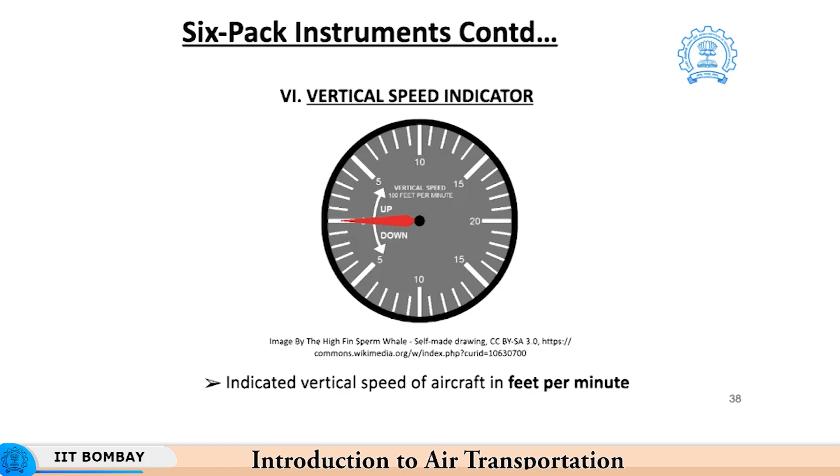So in conclusion, we can say that air navigation is a very key part of safe and efficient air traffic management. Air navigation, by way of carrying out proper flight planning, ensures safe operation of any aircraft while considering the applicable fuel and time consumption penalties. Navigation can be carried out in two ways, that is through instrument flight rules and through visual flight rules. VFR is the most rudimentary method of air navigation, which makes use of a magnetic compass to carry out the VFR navigation. VFR also makes use of two important methods, that is pilotage and dead reckoning, to carry out on-course flight planning.

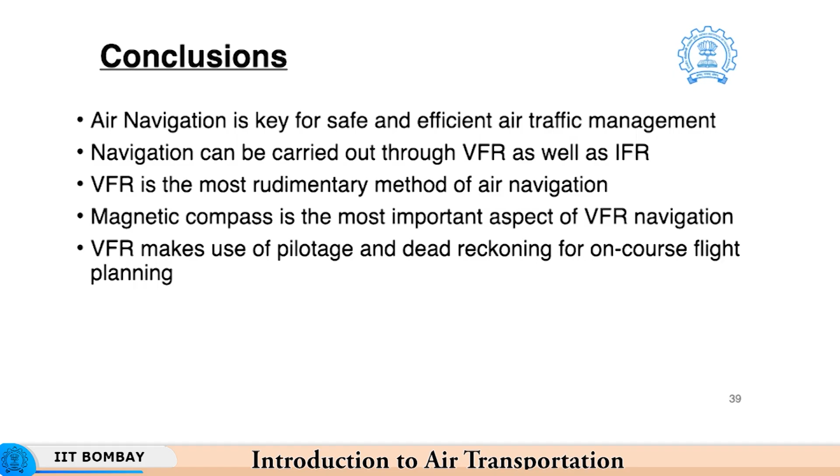The second method, that is instrument flight rules, makes use of the six-pack flight instruments to carry out the navigation. Now when I say six-pack instruments, these are not the only instruments that are used, but they are the most important aspect related to any IFR based air navigation.

In the next slide, we will cover different aspects related to electronic navigation: what are the different radio navigation aids that are implemented by aircraft throughout the world to carry out the navigation, and what are the different drawbacks associated with different air navigation processes.